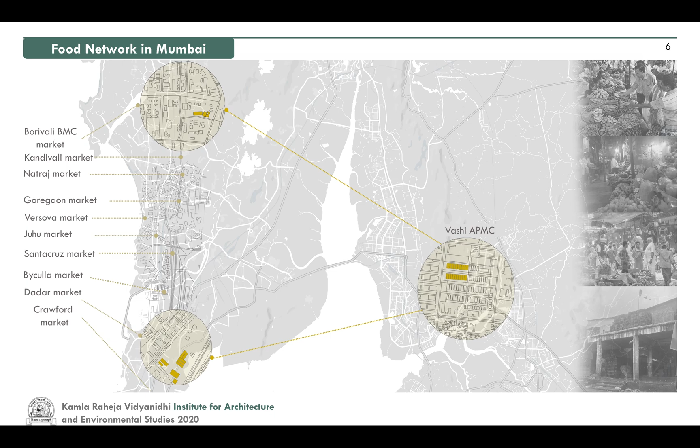Food takes at least 3 to 4 days to reach the consumers, which increases the wastage and cascades the commission at every stage. Due to this, farmers get a meager share of the amount that we pay. As shown, food from Vashi APMC is brought to Borivali and Dadar municipal markets and further distributed to different other locations. These are some site images and the wastage at APMC and BMC markets.

Here, one can see the distribution of other types of markets, local street vendors, municipal markets, formal and informal markets around the city. More recently, an increasingly popular concept of a market is the farmer's market, where the farmer and the end consumer come in direct contact. Such markets are really beneficial for the farmers as well as the consumers because multitudes of middlemen can be eliminated. This helps the farmers to earn a fair price and consumers to get fresh produce.

Such markets are organized by NGOs, hence they are inconsistent in nature. As seen in the figure, they take place once a week and the locations keep moving as per the availability of land. This lack of flexibility causes inconvenience to both the farmers and the consumers. Farmers have to plan their harvest in advance and many a times their product quality starts to degrade before they could reach the market.

Thus, the current thesis tries to integrate a farmer's market into an existing market in order to create a hybrid structure, such that it can also be used as an exhibition center, a culinary school, office spaces, restaurants, etc. Here, we aim to reconceptualize the food web by redeveloping the existing BMC market, which would be farmer friendly, by circumventing the layers of middlemen.

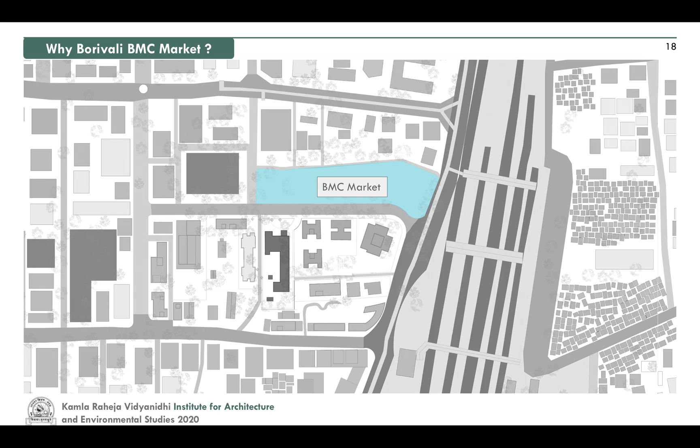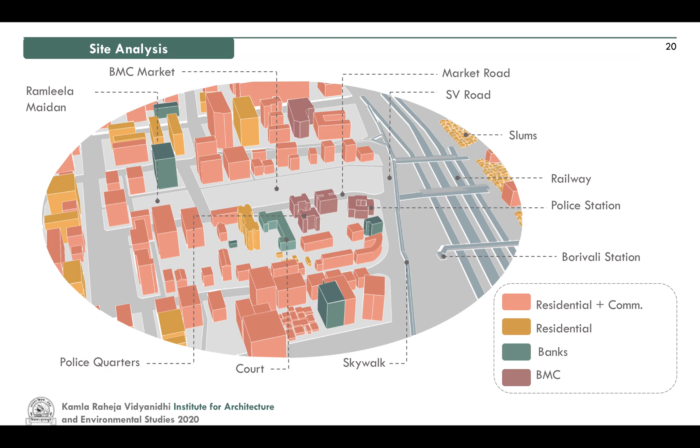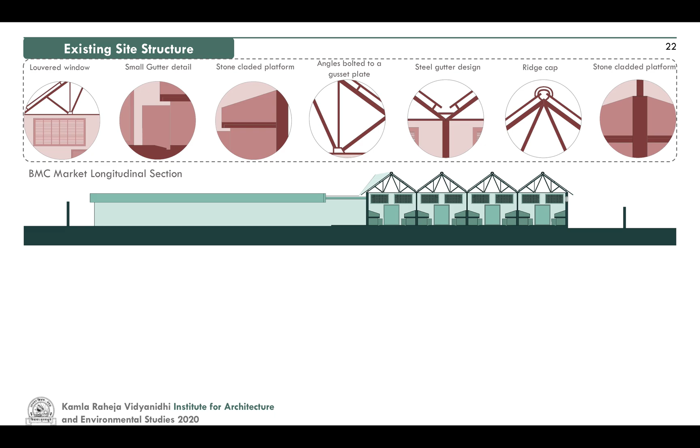Here is the existing site organization with a few pictures. The current market is a basic frame structure with a steel roof and stone-cladded platforms. These are a few details of the existing galas.

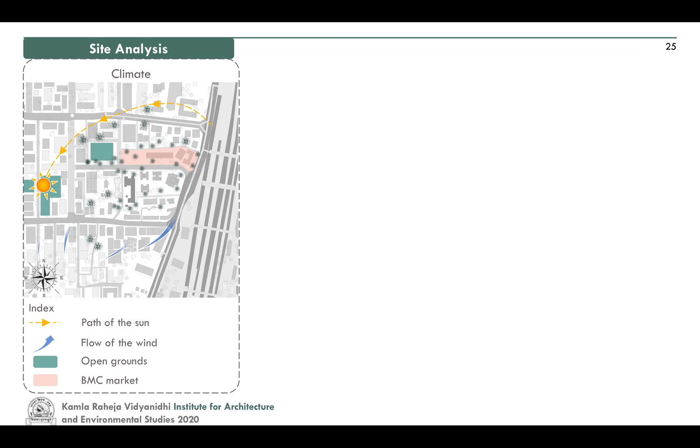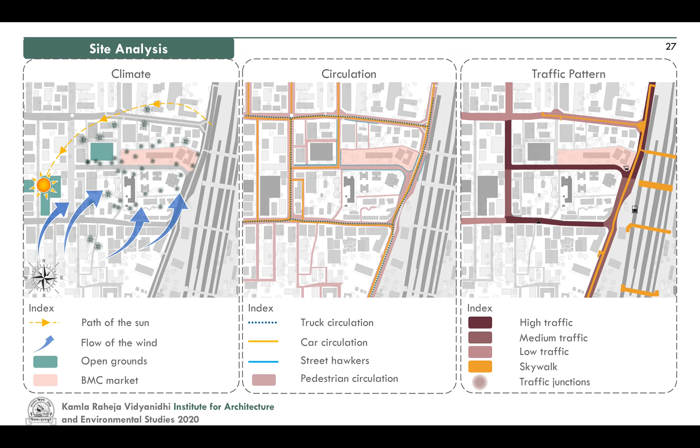The site lies in the east-west direction. One can see the sun path and the flow of wind from the image. The circulation diagram shows the vehicular and the pedestrian circulation and the placement of street hawkers. The next diagram shows the traffic density and the traffic junctions.

Let us now discuss the design process. The site is surrounded by roads on all the four sides. A narrow road passes along the north side of the building. Hence, the service core is represented in pink and is provided at this side. The south side acts like a public realm. Thus, the central part becomes the massing of the market.

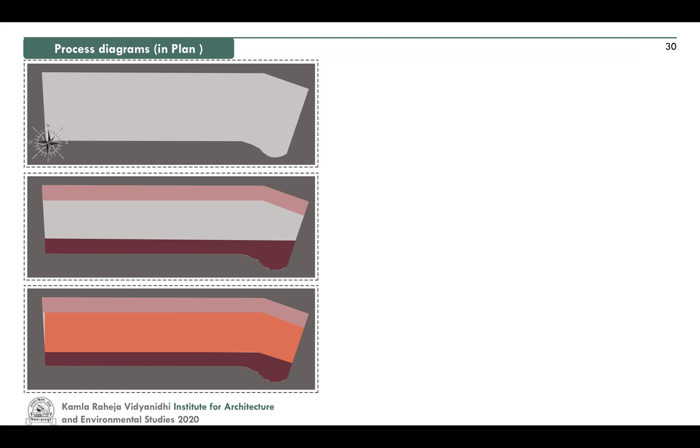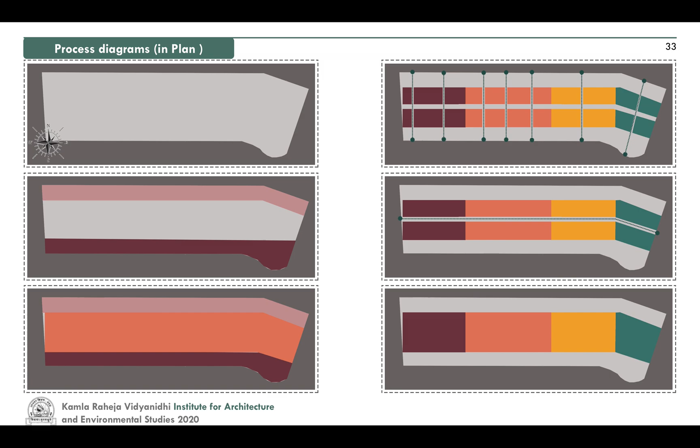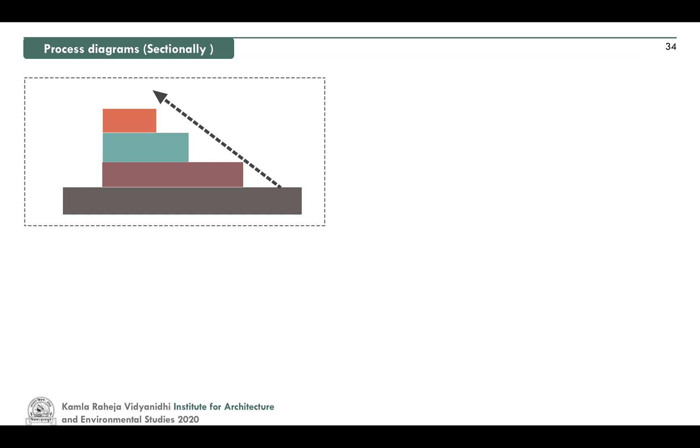The market is divided into four parts and a central corridor provides access to the east-west ends. Also, the regular vertical passages allow circulation throughout the market. The sectional design of the building was planned such that the markets are at the bottom for the ease of access and the hybrid programs at higher levels.

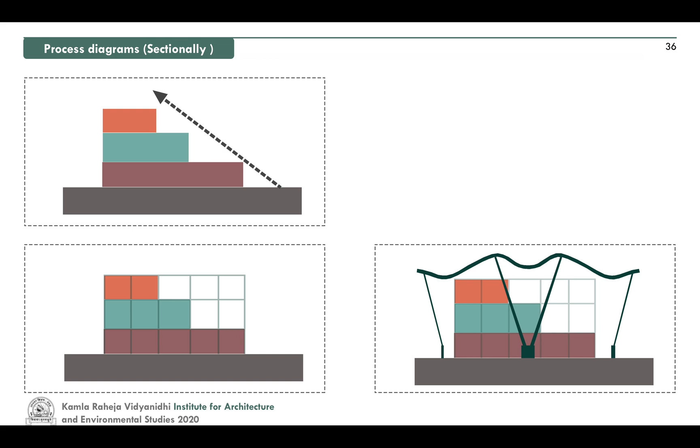A scaffolding would allow porosity to the building. Further, an independent and aesthetic roof over the building would provide a singular and unique identity to the hybrid structure. A large independent roof and the porous building allows good ventilation of hot air.

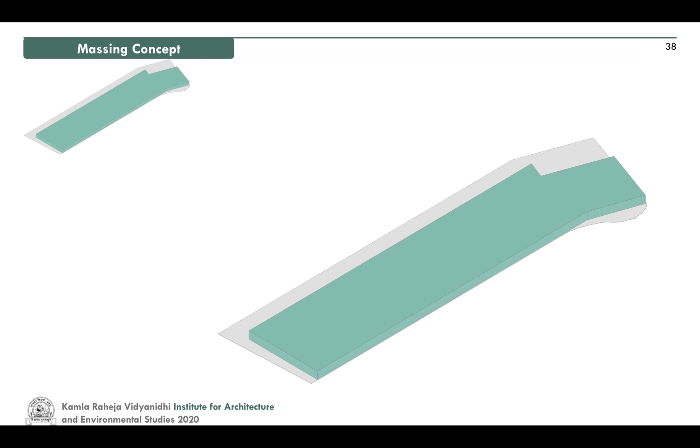Let's now discuss the massing model of the proposed building. The grey area carves out the vehicular circulation from the massing. The idea at this stage was to cascade the building and keep the upper floors light, which would create hierarchy of different spaces. It being a market, it is important to determine the service core at regular intervals.

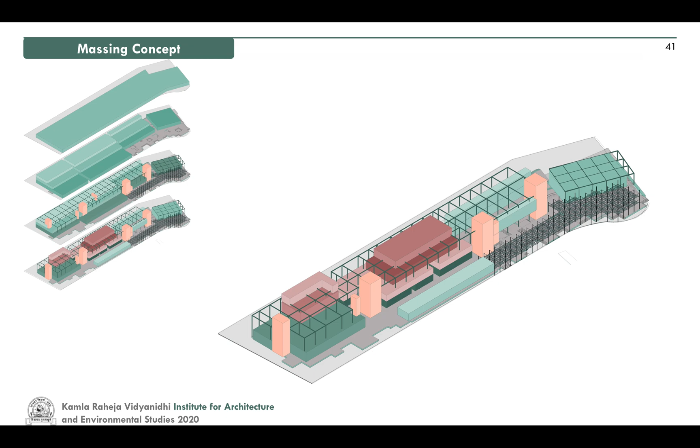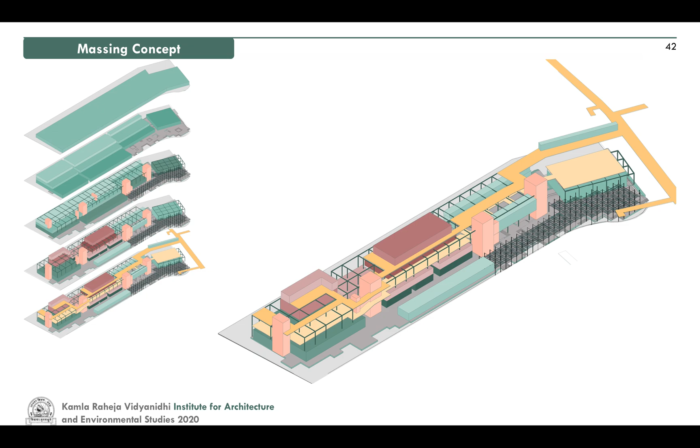Further, the plinth is designed as a platform for farmers' market, which is a temporal structure. It can also be used for other recreational activities. Further, the breakdown of massing sectionally lets us create terraces and pockets at higher levels. An important element here is to incorporate the skywalk which bridges between the programs.

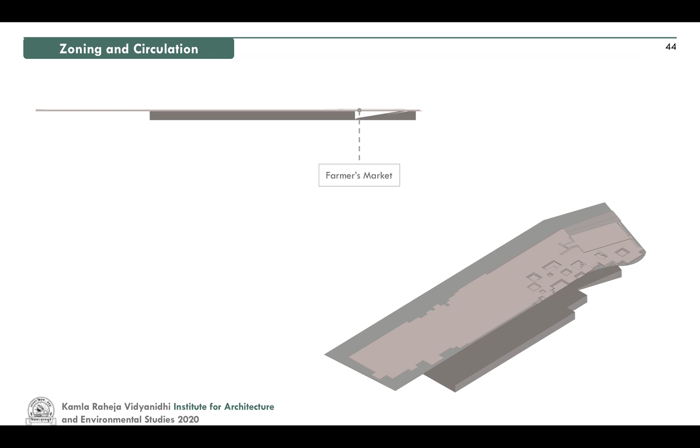Lastly, the use of a large and a lightweight roof which encompasses the building would provide good shelter against the climatic conditions. The plinth is primarily designed for a farmers' market. The figure below shows the vehicular movement around the structure.

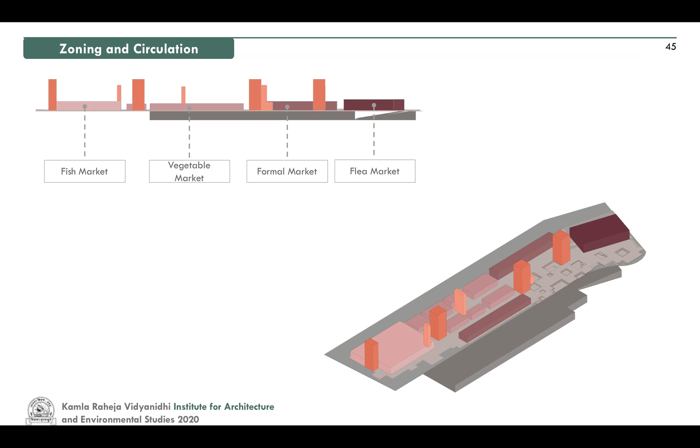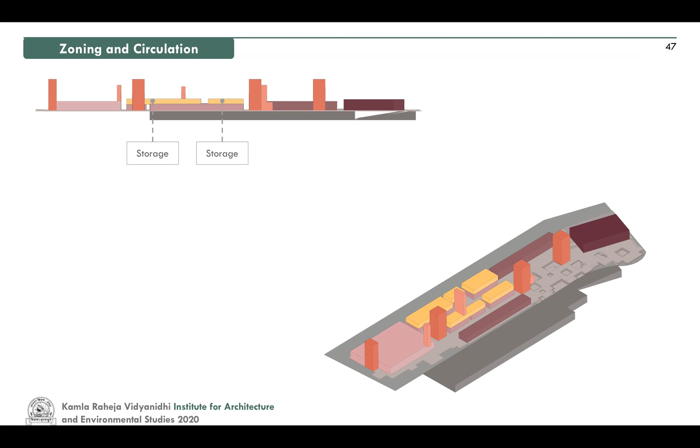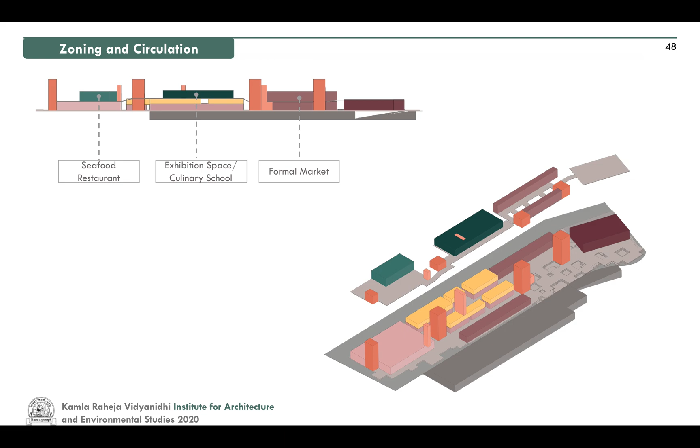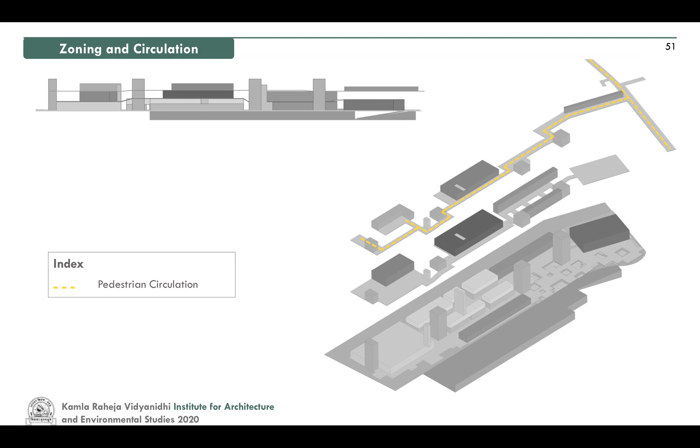Let us now discuss the ground floor plan. It is a linear 180 by 50 meter island plot surrounded by roads. The southern facade faces the court building and is adjacent to the market road. This side of the building is heavily crowded. Thus, the plinth is designed to allow a free flow in and out of the market.

The eastern side of the building lies adjacent to the SV road. Hence, a direct access to the basement parking and the load and unload zone for trucks is provided on this side in order to avoid traffic congestion.

The ground floor plan is divided into four different markets with staircases every 30 meters. Let us now focus on the fish market. The fish market is purposefully sidelined to avoid the spread of foul odor. It is designed like a centrally air-conditioned glass box. This would prevent the spread of foul odor and also provide lower temperatures for fishes.

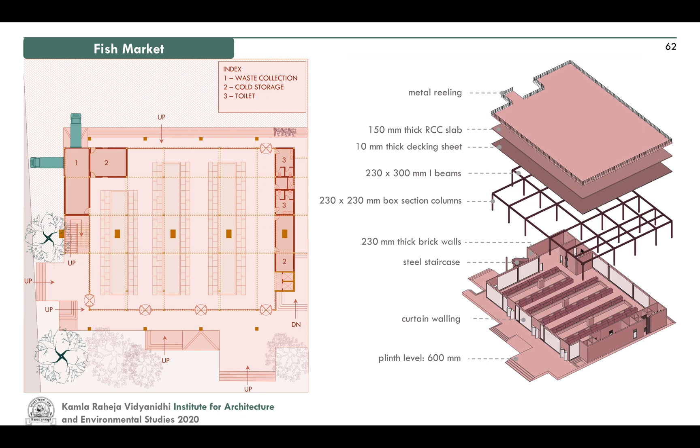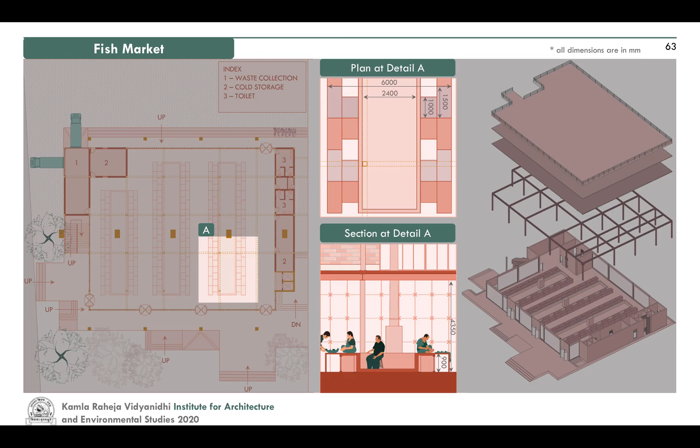The market has 78 galas in total divided into 3 long clusters. The clusters are such that it provides a central storage that can be shared by both the neighboring platforms. The material of the seating is granite and that for the fish platform is PVC plastic. This is the view of the fish market.

Moving on to the vegetable market. The vegetable market has different gala clusters on both the sides, allowing the central aisle to be the main circulation. Every cluster has a work and live typology, where on the lower level, the galas can be used for trade and the upper level can be used for storage or living space. Every cluster has a waste collection and storage room. In total, there are 93 vegetable galas.

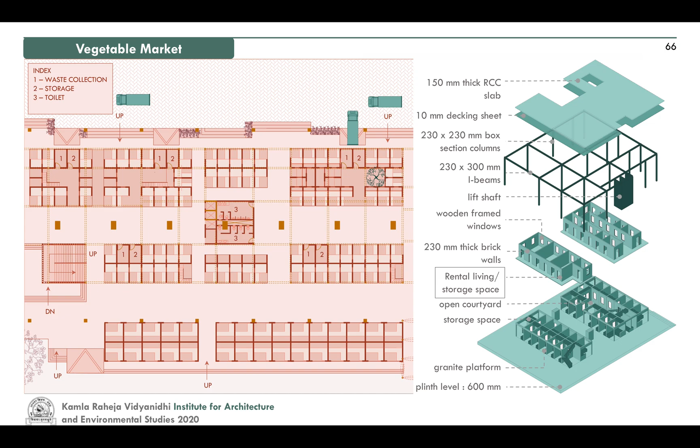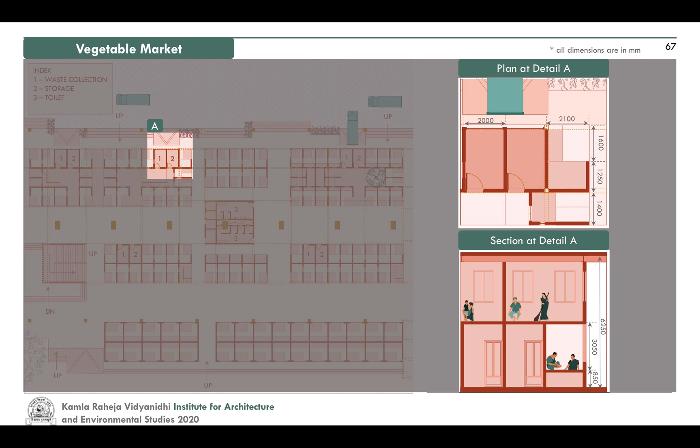Focusing our attention to single galas. Storage space has been provided under the platforms. Every gala shares a partition wall with the louvered window for ventilation.

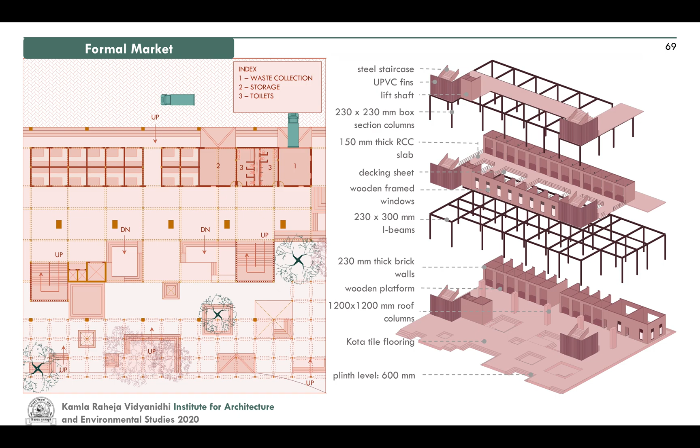Moving on to the formal market. The plinth merges into the market, creating informal spaces and small seating gestures. The market has a huge storage space and waste collection shared by the galas. This market is repeated on the first floor. The galas of this market are 3 meter by 3 meter square spaces provided with an L-shaped platform with storage facility under the platform and in the overhead space.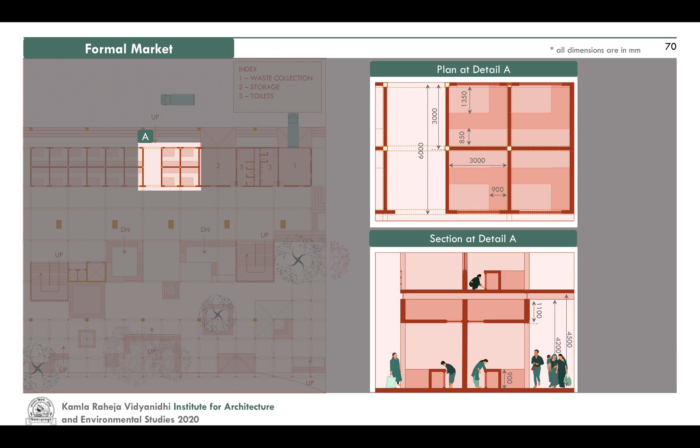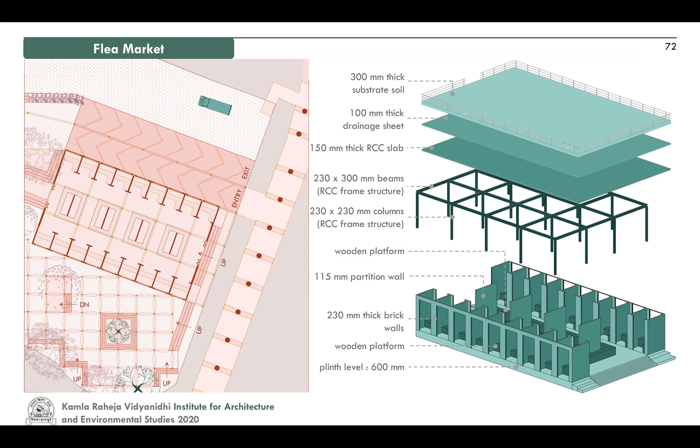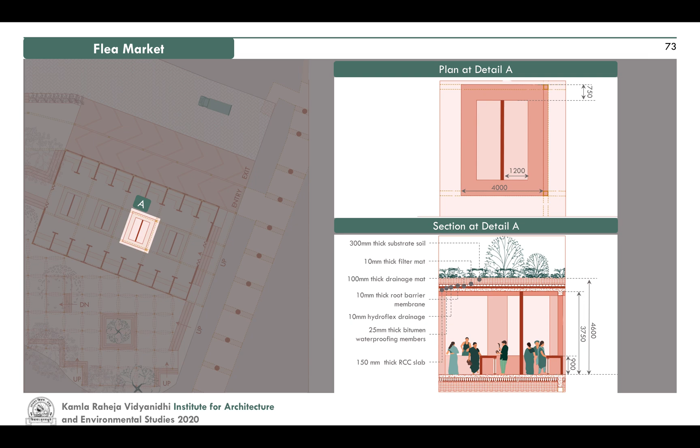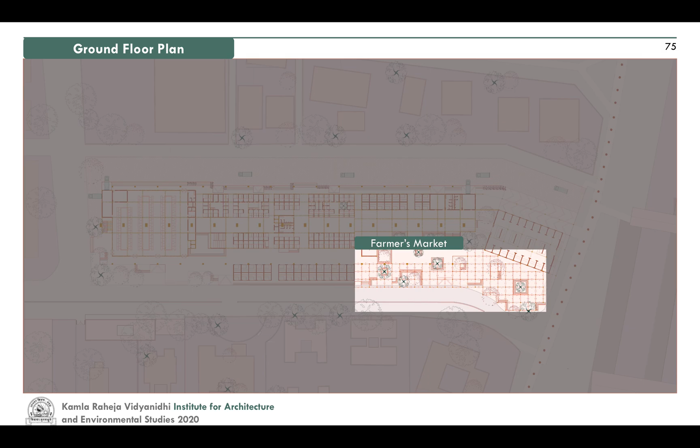Let us now focus on the farmers market. The relationship between the farmers market and the flea market is evident from this picture. The small seating gestures by the plinth can be utilized to trade by the farmers. The farmers market is provided with a temporary tensile structure made up of thin steel columns and tensile cloth to allow filtered sunlight.

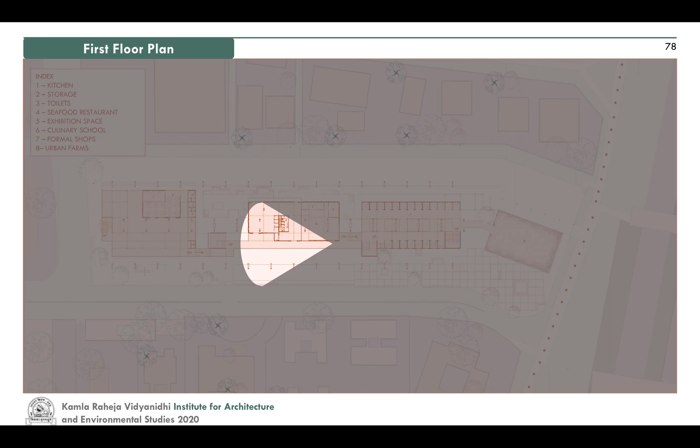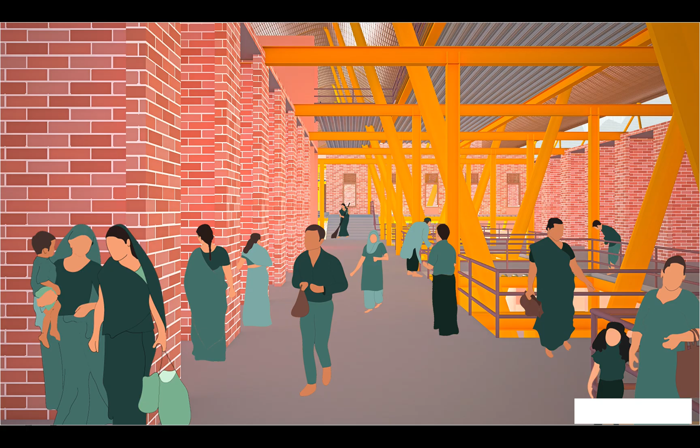The first floor plan consists of hybrid programs such as seafood restaurant, exhibition center, culinary school and small organic farm. The formal market is extended on the first floor. The view from the passage outside the exhibition center is shown. The aesthetics of the roof and the porosity of the building would encourage people to admire the building standing at this passage. The view from the formal markets is as shown. The central voids in the formal market allow one to look over the market beneath.

The second floor plan consists of hybrid programs such as rooftop restaurant and BMC offices. The skywalk is incorporated into the building, which would provide a bridge between the programs. Since the skywalk is connected to the railway station, it would encourage people to enter the market and thus change the movement pattern. The skywalk has small landscape gestures giving it the aesthetics of a sky garden.

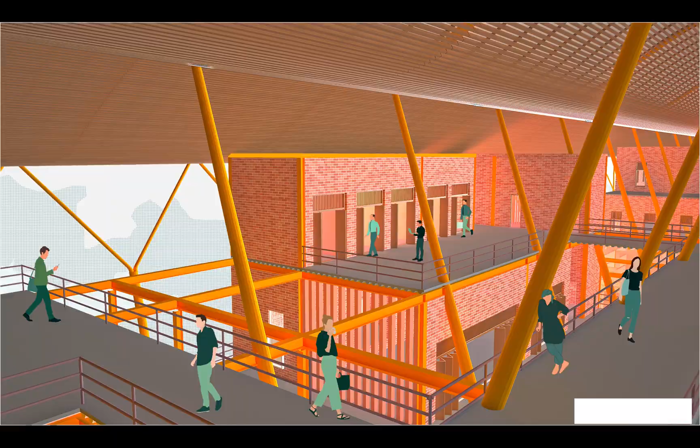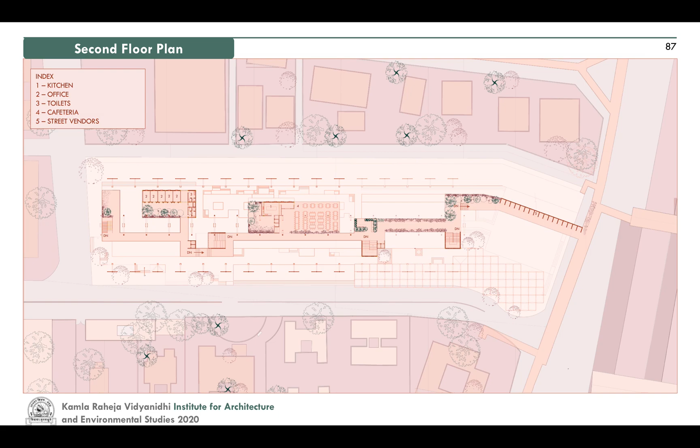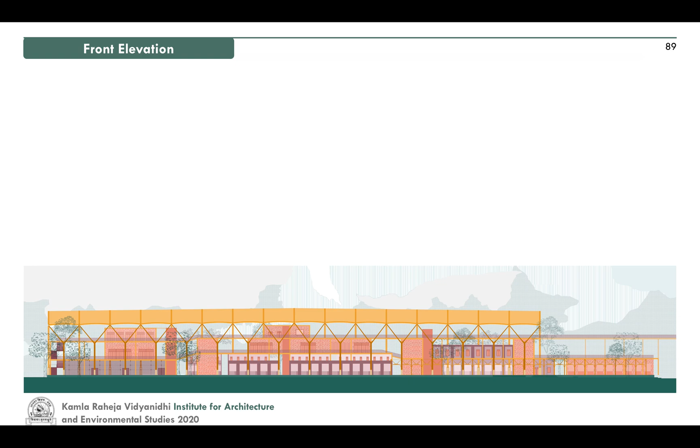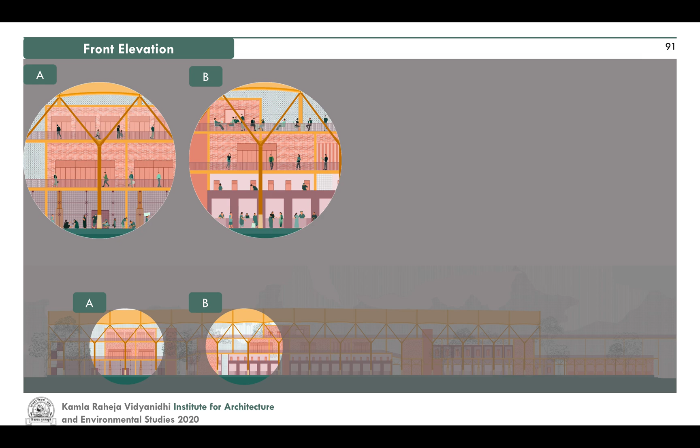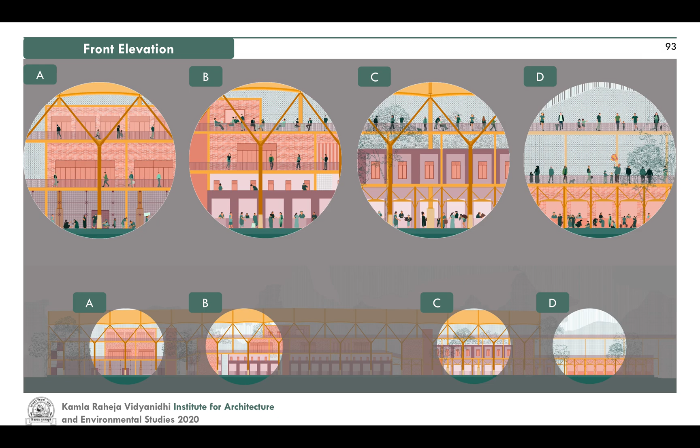Let's see the details here. Detail A shows the front elevation of the fish market, gallery of the seafood restaurant and the BMC offices on top. Detail B shows the interaction at the formal shops on the roadside, the culinary school and the rooftop restaurant on the second level. Detail C depicts the interrelationship between the formal and the farmers market. The last detail shows the extended skywalk.

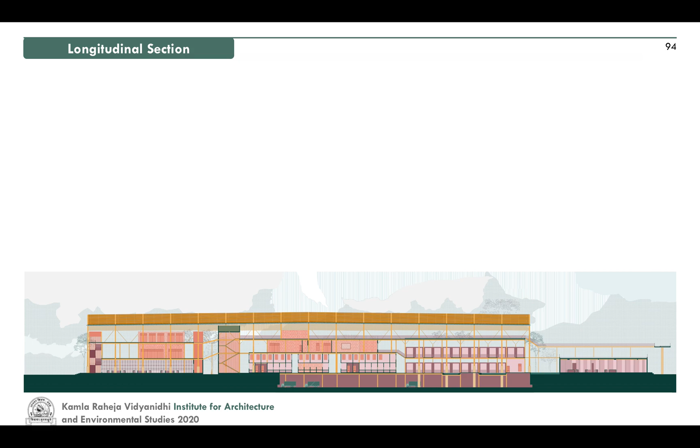The longitudinal section shows how the skywalk intervenes into the project. Further, the section cuts through all the markets, depicting the experience of the fish market, the vegetable market, the formal market, and the flea market.

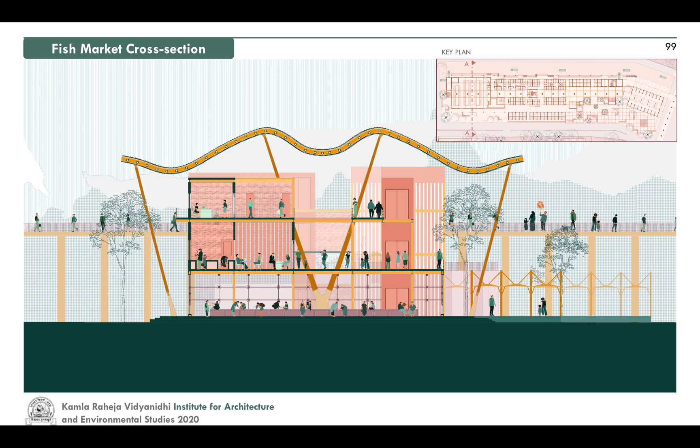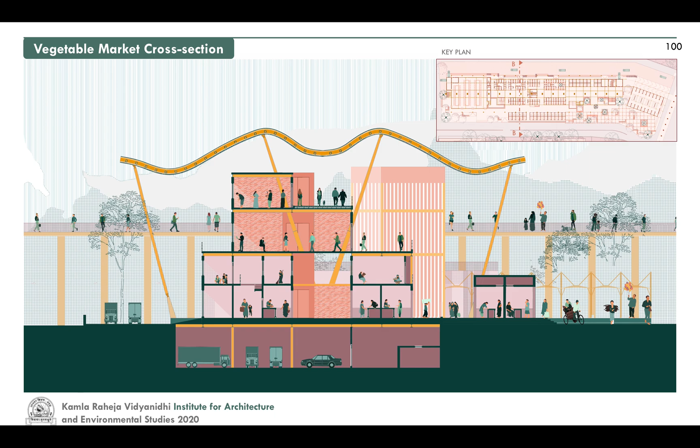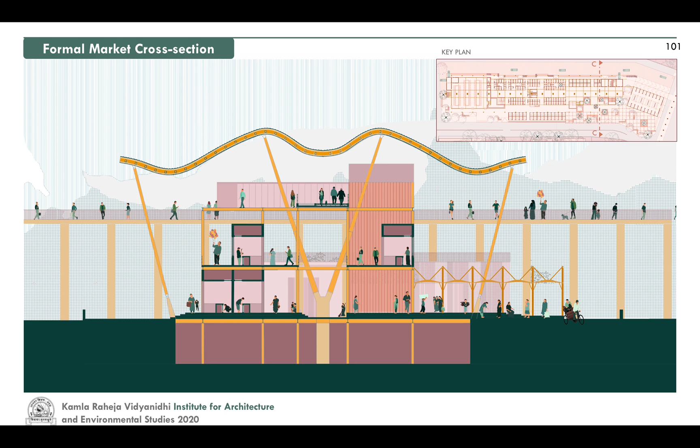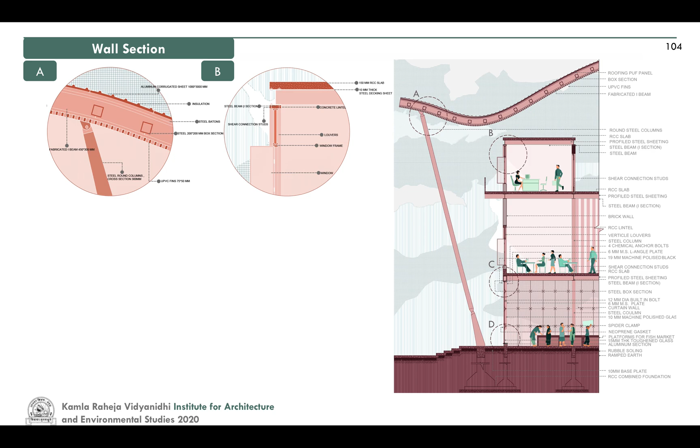This picture represents the wall section through the fish market. Detail A is the roof detail, which will be explained later. Detail B is the lintel detail. The RCC slab is cast on the decking sheet and further is bolted to the steel I-beam section. The vertical louvers are fixed in a wooden frame above the window to let in partial light. Detail C represents the joinery of the curtain walling connecting to the I-beam section. Detail D represents the curtain walling detail getting attached to the ground.

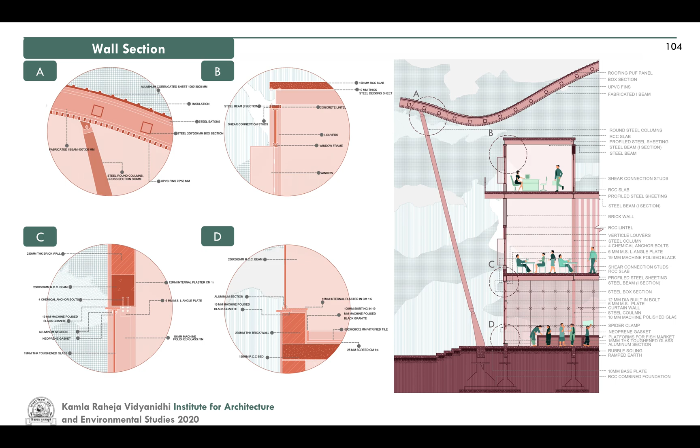The roof is supported by 3 aisles of columns. The columns are placed at an interval of 9 meters. The Y-shaped columns at the north-south ends are made of steel and are supported by the concrete pads below them. The central V-shaped columns are also supported by concrete pads. The fabricated I-beams rest on the arms of the Y-shaped columns and the V-shaped columns. The box sections connect the fabricated I-beams longitudinally.

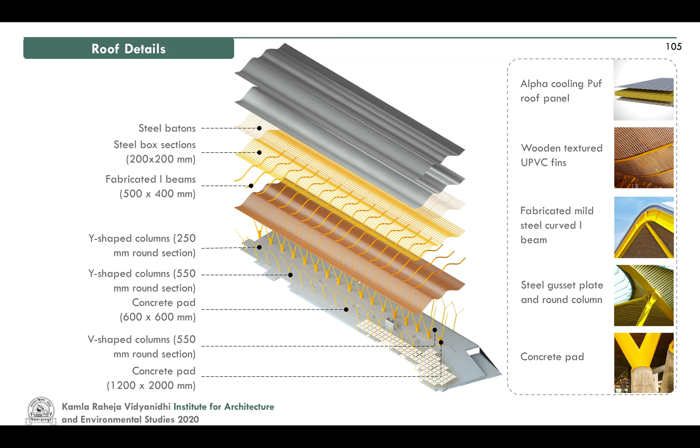Further, the steel battens run laterally, creating a grid. On top of this grid is the final roofing material. It consists of 2 layers. The lower layer is the insulation, which keeps the structure cool, and the aluminium corrugated sheets get bolted to the insulation layer. Wooden UPVC fins are used on the inner side of the roof for aesthetic purpose.

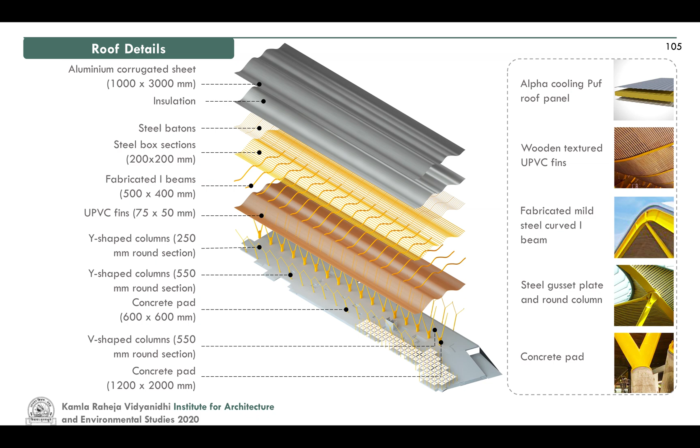The roof is divided longitudinally into 2 groups of 8 bays each, the central bay being at a higher level than the bay at the end. This 1:80 slope is provided for the rainwater, which passes through the gutters provided at both longitudinal ends. On the right hand side is the material palette of the roof.

This is the material palette for the building. Glass is used for curtain walling in the fish market to prevent the foul odor. The toughened glass is 15 mm thick, supported by spider clamps. 300 by 230 mm I-section beams are used in the scaffolding. 230 by 150 mm UPVC fins are used around the staircase for ventilation purpose. 230 by 230 mm box section columns are used in the scaffolding.

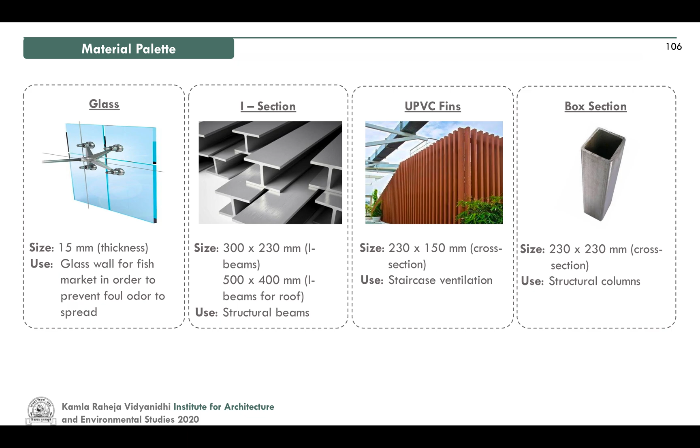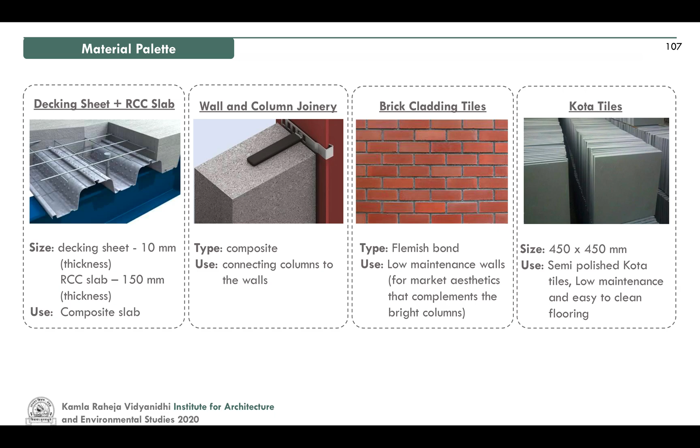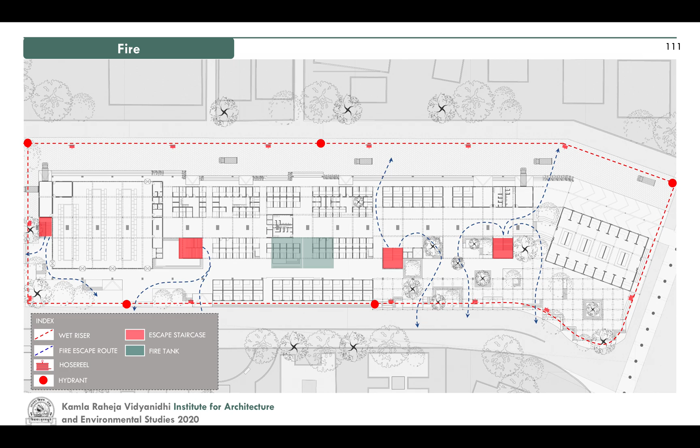and the conclusion. A new module for the markets has been proposed. This new market module will prove instrumental in establishing a direct relationship between the consumer and the farmers. The new concept of the food web would help farmers attain fair prices for their produce. The aesthetics of the building would complement the context. The hybrid programs would revolutionize the notion of a market. A better utilization of the skywalk would help to fill in the urban void. Finally, the module sets a standard for future development of new markets in the city.